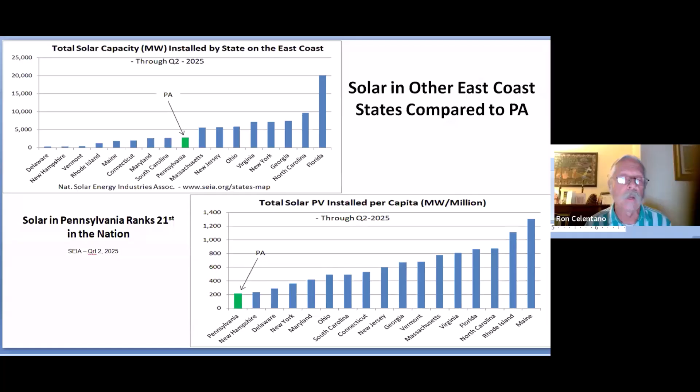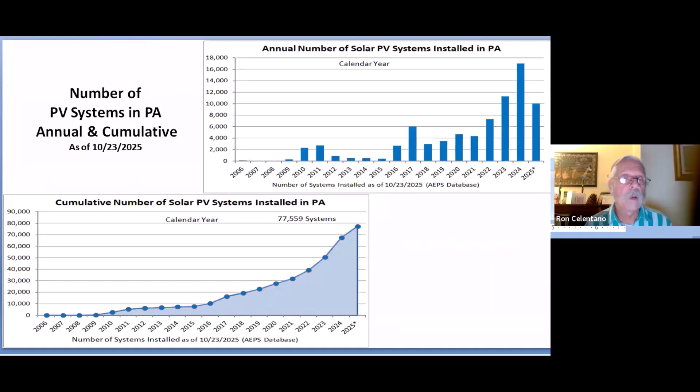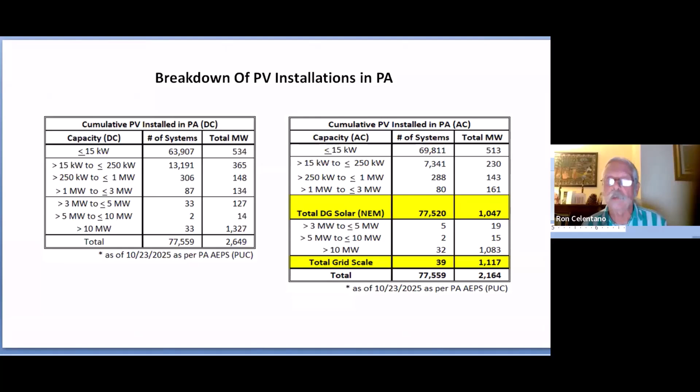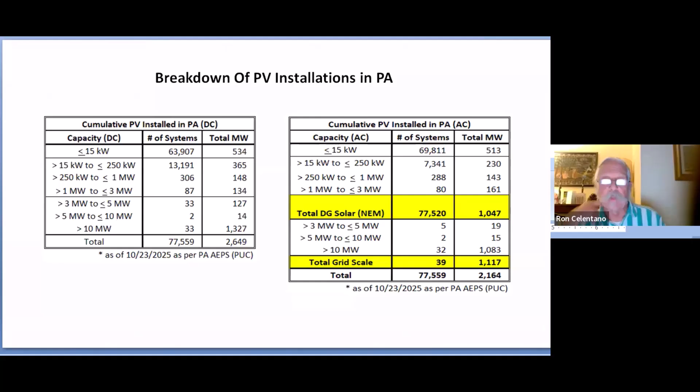Going down here, this is a breakdown of AC versus DC broken down into categories. So less than 15 kW is roughly residential size, then other categories. If you go past greater than 3 megawatts on the AC side, that becomes a grid scale project. We're looking at about half of the systems installed being DG systems, or distributed generation, behind-the-meter systems offsetting electric bills mostly, and the other half, another gigawatt, is grid scale. We can see a lot of systems installed in very recent times, basically the past 2.5 years.

Here's a breakdown of that in just the recent years. The gray bar shows the DC capacity, the total of all solar panels' rated values on the DC array, versus the AC or inverter capacity, which is normally smaller than the DC capacity of any given project. These are annual figures, and you can see how grid scale has picked up steam in 2023, 2024, and even into 2025.

What I find interesting, though, is when you look between 2024 and 2025, there's actually been an uptick in large commercial projects greater than 250 kW to 3 megawatts AC. So that's picking up a little bit more as well. This gives that breakdown of residential versus small, large commercial, and grid scale.

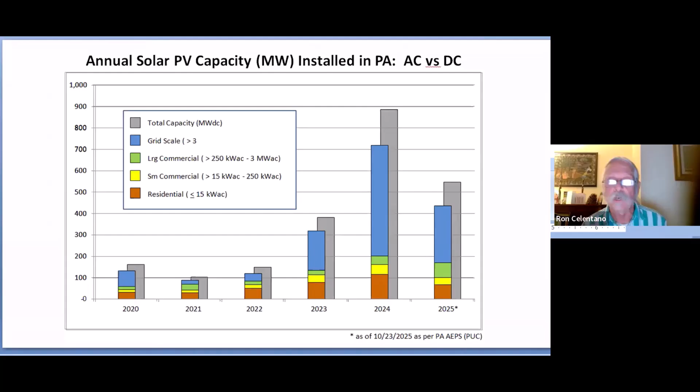Hold on one second, I'm going to blast through this really quick. This is on the PJM side, this is the grid scale stuff that's going on.

It's kind of showing how there were so many applications, you heard about this last month, and there's literally a jam up of a lot of big projects that are really moving very, very slowly in the queue. This graph is showing roughly how many it had peaked at, quite a few. We were almost at over 20 gigawatts of applications that were in place. A lot of those have either gone online, been constructed and gone online, or they actually fell off, pulled out altogether.

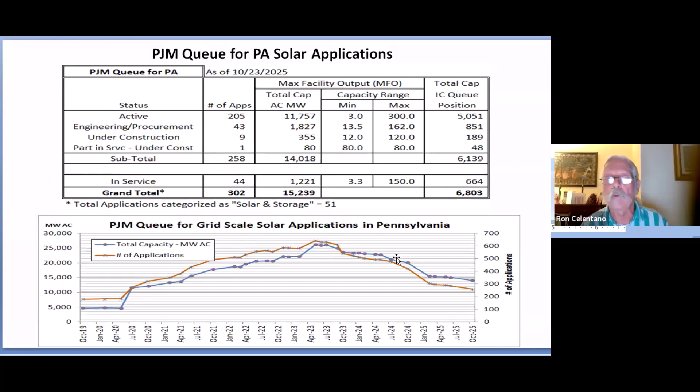This one shows the number of systems that are in construction right now. We're talking about almost half a gigawatt that are in construction currently. Some of these are pretty big, 120 megawatts, 90, 80 megawatts. We have some large systems. The graph is going up and down because as they go online, they fall off this graph, or they're at least in construction. As time goes on, a new one might come in from an application standpoint and come into play as being in construction.

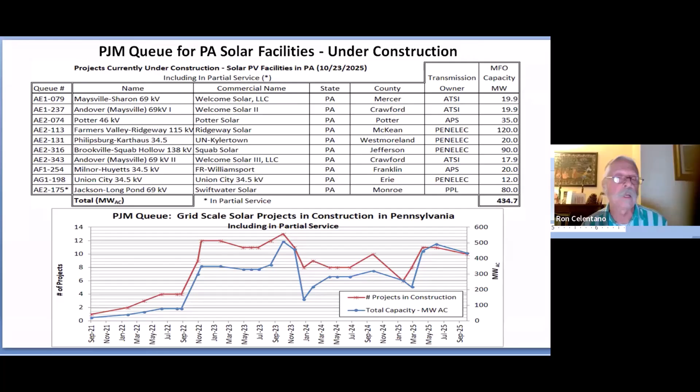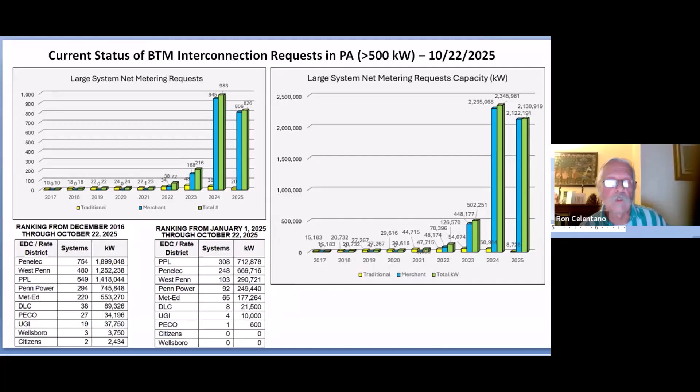I'm going to jump into talking a little bit about balcony solar, which you may have been hearing about. This is very popular in Germany and other countries in Europe, as well as around the world.

It has recently passed in Utah, and it's basically called plug-in solar. The concept is you could buy, say from Home Depot or IKEA, a solar panel with a plug at the end of it, take it home, hang it up off the side of your house, and just literally plug it into the wall. That's the simple concept behind it.

This has passed in Utah, and many other states are interested in drafting bill language to do that, including Pennsylvania. In fact, it could be the end of this month or beginning of next month that something comes through as an introduced bill. There's already a memo out there, a co-sponsorship memo, and there's a link for that so you can see how it's described for this particular bill. It's going to be coming out or being introduced soon.

What's interesting about this is that ideally you can buy this device, hang it up, plug it in, and you don't need to apply for an interconnection application. You don't need an electrical permit. You don't need an electrical inspection. You just plug it in and it offsets your electric bill. It might be very little, because it may only be 800 to, at tops, 1,200 watts of a system.

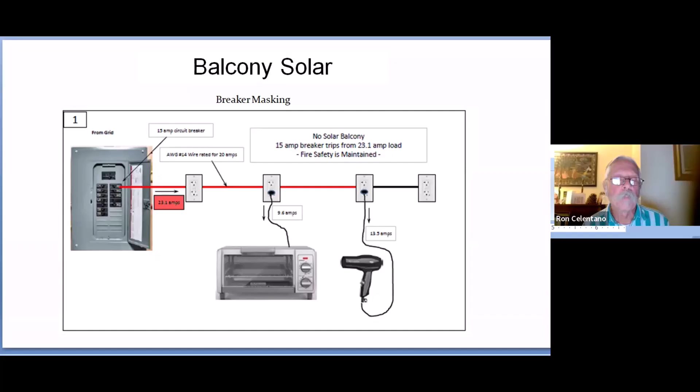So the point is it would be kind of important that the balcony solar is plugged into the very last outlet within a circuit. Now, the reality is no one knows which outlet in your house is the last one in your circuit. It would be pretty difficult to find what that is.

But this is where it becomes a problem. Let's say if I plugged it into the first outlet next to the electric panel. Now this is what we're talking about, the masking effect. You have the same loads there, but now they're both coming down from the same area, not distributed evenly across the entire wire. They're both coming from the same side of the wire. So the breaker does not see the overload, but the loads are still being served, and the wire is getting hot, exceeding what it's rated to provide with regard to current flow. So this becomes a problem.

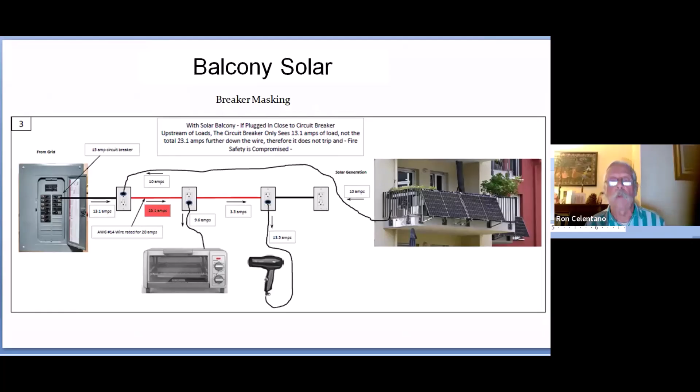And so the answer to some of these things is that they're coming up with concepts like smart plugs. So you may have to have a typical plug replaced with one that can sense the flow of electricity through it and will shut off if it senses there's too much draw relative to what's going on there. That's one of the things being discussed right now, and maybe there's going to be a UL listing for certain types of smart plugs.

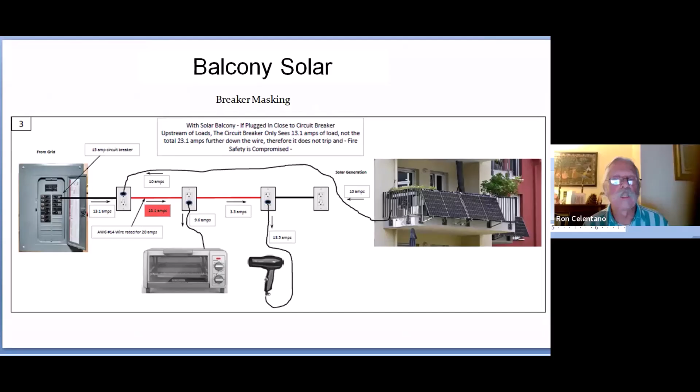So that is that. Let's see here, I'm gonna jump to... let me see. Chuck, can you see this? Okay. Yes, okay, we can see this. It's the same format that the other was in. It says Philly Green Solar Roof.

Yep, okay, good, thank you. So I'm jumping into this. This is what the other frame of this conversation is going to be about. Now, there's a lot of slides here, I'm going to jump through a lot of pictures, so I'll try to get through this pretty quickly.

So this is basically about a project I worked on. Ron, do you want to try theater mode again and see if you can bring that up, just to see if this is a different file? This is a different PowerPoint file, right? Yeah, you want me to try this? See if that works. You probably can't see that, right? At the very bottom on the right-hand side, the last icon to the right. Okay, I have a full screen. You do not? No, we do not. No, okay, yep, sorry, sorry to interrupt, just wanted to give it a shot. We have it, almost. Okay, sorry about this.

So this is kind of doing a real summary on what this is. The Onion Flats is a combination architectural construction group that was really working on passive house design, going back several years when they first did a lot of this. They did basically 3 systems, and they also work on green roofs, so they really cover the gamut on all the perspectives of passive house with green roofs. And they pulled me in to get into the solar design of some of these projects.

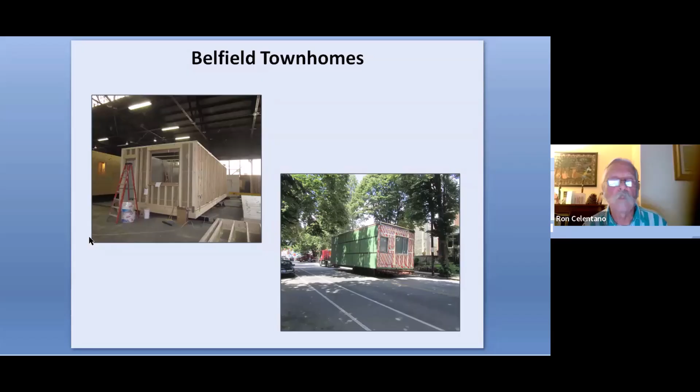I was going to just show you some quick shots of this being constructed. These buildings were built off-site in a warehouse, a very controlled environment, built in sections. You could see it being trucked along and put in place, and here they're using a crane to drop them into place. Then they really tighten them up. These are typically triple pane windows, super insulated, really getting to tightening up all the seams.

Now, what's really challenging with this, of course, is the electrical and plumbing is all done per partial floor, if you will. These are complete floors where they're dropping them in, but then you have to interconnect them after you drop them into place, and that's always been a challenge. You're trying to get it to everything - the plumbing, everything - to land just right, but you still have some problems to coordinate that. Eventually that gets lined up.

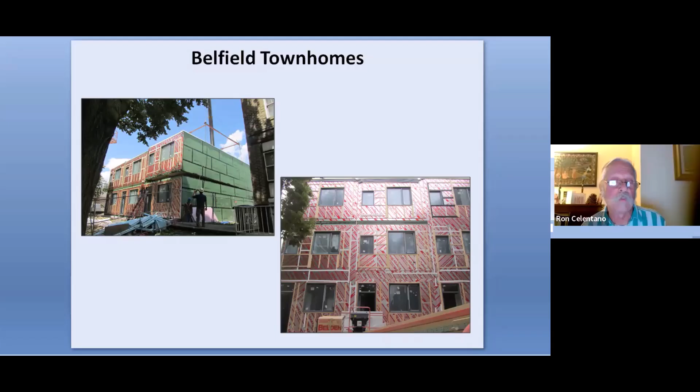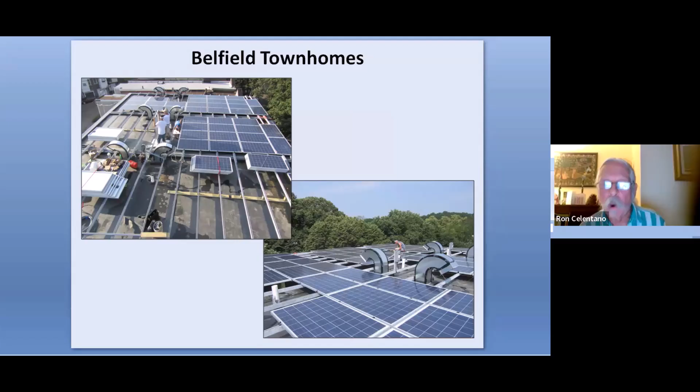This is sort of the end product of that project. Here's just some of the solar that was being assembled. Now we did use, unfortunately, some pressure treated plywood to help with some of this racking, but it's mostly horizontally positioned on this roof.

Yeah, so this was pretty successful at the time. I have to say, this was a long time ago, and I do not know how well it's performing at this point at all, because it was done for a particular owner.

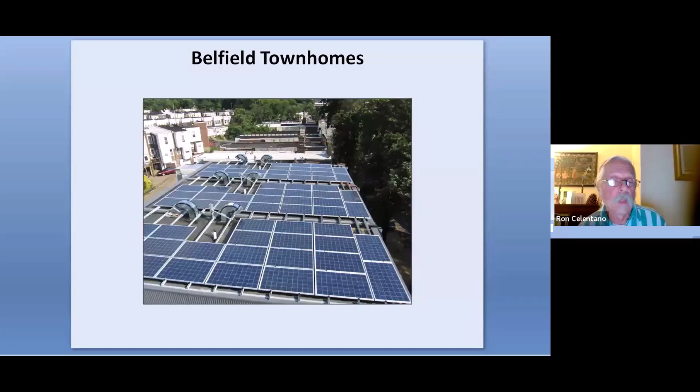The next one was Stable Flats, number 2, and this one we did incorporate green roofs into this. Again, it was really the same type of thing, 3 row homes next to each other, but 4 stories tall, and it was really market rate housing, so it was more high end.

Although it was all very much designed as hard as they can try to make it a certified passive house, they just fell short of achieving that, and that's usually done with a blower door type of test along with other things. They just fell short of meeting that criteria, but it was nevertheless still built for that.

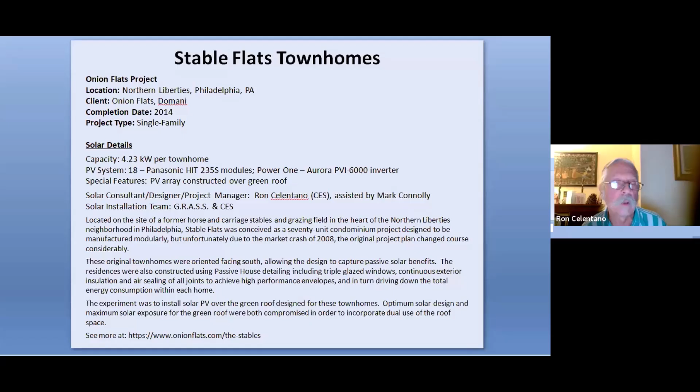So each of these row homes at 4.23 kW per townhome, I should say, but they were typically 4. Let me see, I'm trying to think of some of the other details on this - there's nothing really. Triple glazed windows, super insulated, same type of thing there.

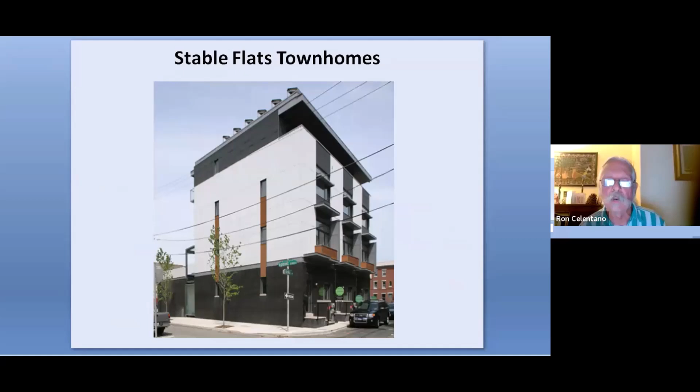And this is how I was looking at it. This is Northern Liberties, by the way. So you can see the modules, the arrays up on the roof of these 3 row homes right here.

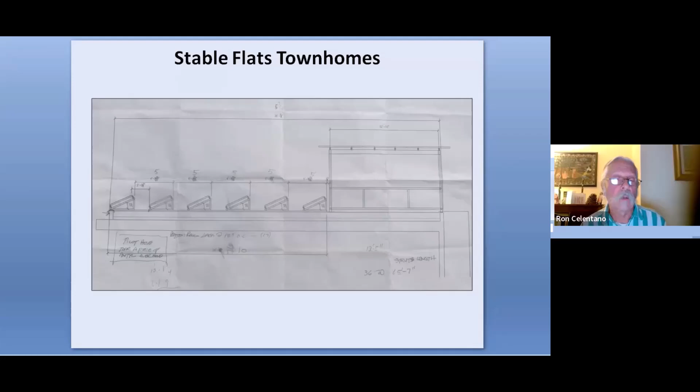Now, when we were starting to do this, it's always a compromise on how do you get the most solar, but still allowing for ambient lighting or indirect, diffuse lighting to go in and feed the green roof. So it was a balance. You're not going to get the best orientation to get the most generation, but you also want to be able to have your green roof work well. So this is the end product of that.

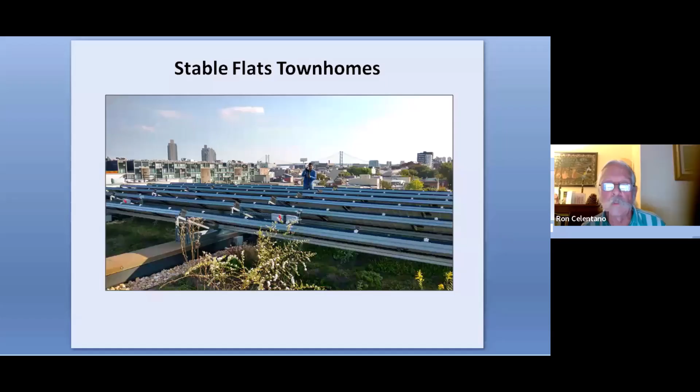This is probably a couple years afterwards when it was already installed. So you could see some of the greenery that is there. Here it is again in the background.

What happened was the economy kind of went south about that time. So Onion Flats wasn't able to continue with the full development of this, so that was sold off to another developer. They continued to build some of these structures, but they didn't have solar on them.

Now I think this was about the time, I think it was 2014, when transformerless inverters came into play. Now of course with transformerless inverters, you basically have to have a different configuration with your DC disconnect. You have to have it both on the positive and the negative side in order to do that. The inverter was down in the basement.

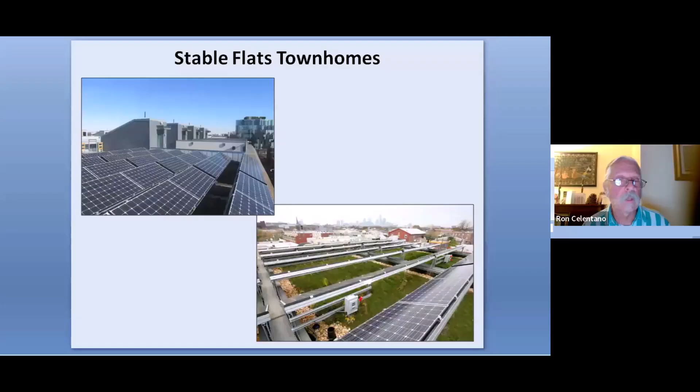We fabricated everything, or I should say Onion Flats did all the fabrication. They welded all of these racking systems together. This was basically spanning 16 feet across the parapet, and we used Unistrut to span that area and load these Panasonic modules on top of them. It was an interesting challenge to get the right fasteners to hold those modules down in place, but that all eventually worked out well.

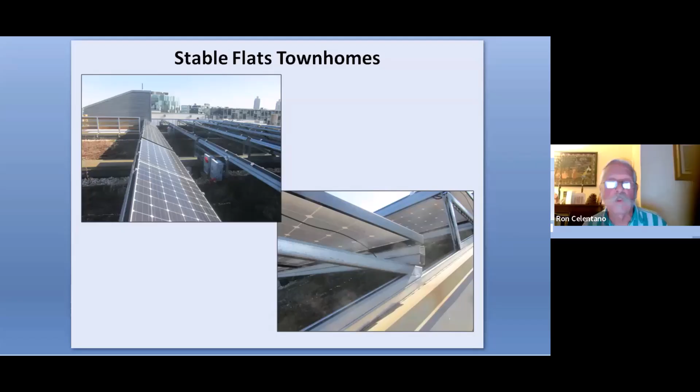The third project here is Capitol Flats Apartments, and this was a next step up - it really was an apartment building. The previous ones were row homes, but this is actually a 4-story apartment building with 25 units. The attempt was to try to do net zero energy, but it wasn't going to happen because there's not enough surface area on the roof to do that. This was a 77.7 kW system installed on top of the roof of this building.

What was interesting about this too is that Onion Flats had two 1,000-foot deep geothermal wells. This went pretty much down into the Schuylkill, I think, pulling up water from there. The crazy thing about this was it was not a closed loop - it was an open loop, meaning they sucked up all the water, and I don't know how they got away with doing that. They realized it was crazy to do, because the filtering that was required was enormous. A lot of upgrades had to be done to filter all this river water coming in, and it became a real problem at the end of the day.

They also had ground source - a big heat pump water heater that served the total building. Water that came up from the geothermal system, or water that exited from there, would pass into this heat pump water heater to begin the process of pulling heat and adding heat to it. So it would serve the hot water, and then be fed into two electric water heaters. But those never really went on - the temperature was already up to what it needed to be. They were really just holding tanks.

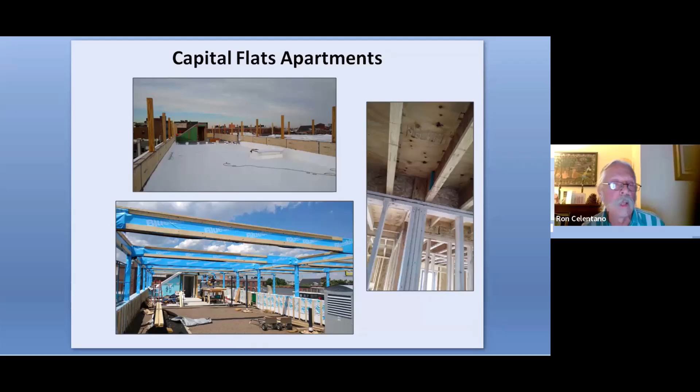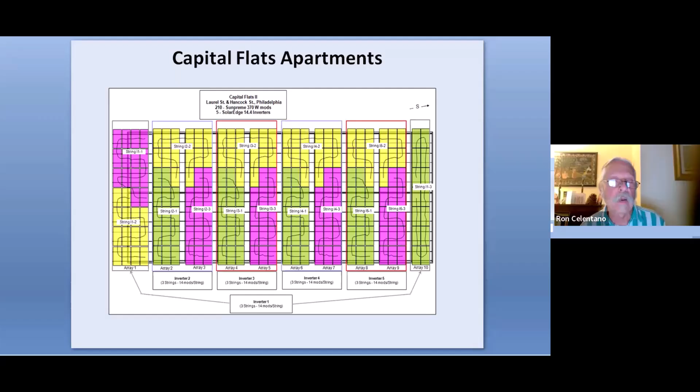This happens to be the wiring, just laying out the string wiring. This was a SolarEdge system - there were 5 inverters, and this shows how the wiring was arranged for the layout of those systems.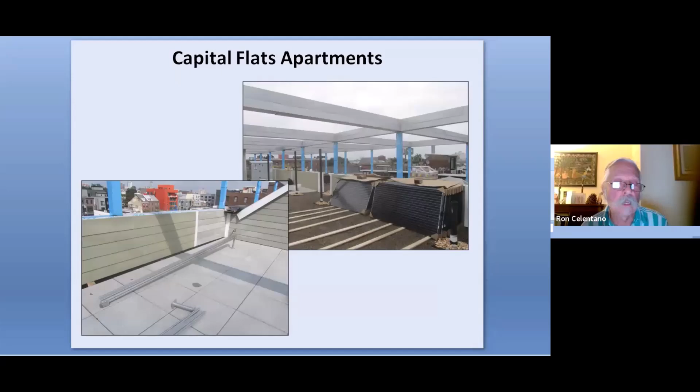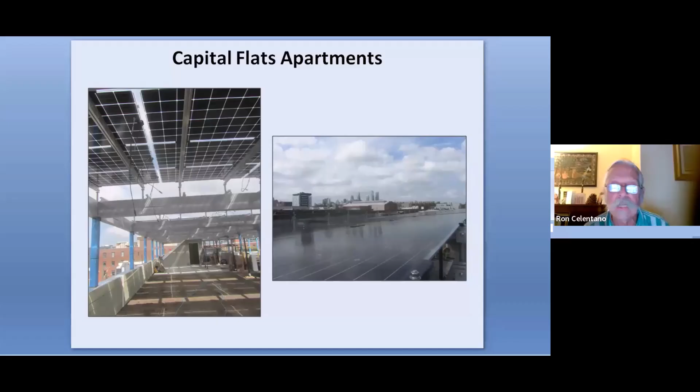Here are all the modules - these are bifacial frameless modules that went into play. And this is it in the process of being constructed on top of that. It has about a 4-degree pitch.

Here is the home runs of all the wiring, because all the inverters are at one end of the building, so they were all being collected, running down the length of the building.

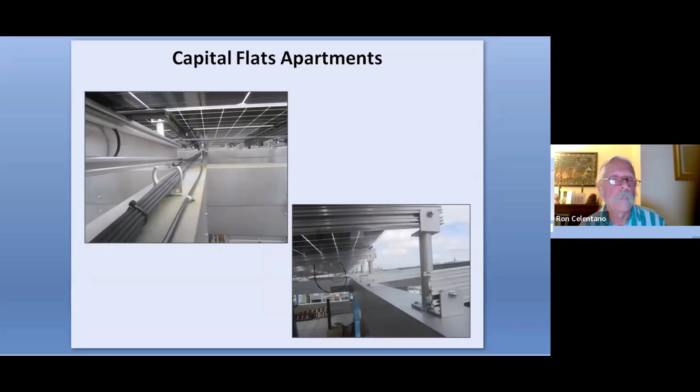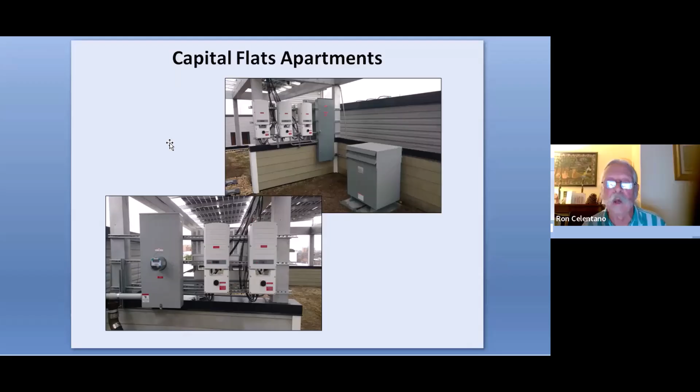This is a zigzag transformer that we needed in order to comply with PECO's effective grounding rule. It turns out to be creating sort of a neutral as a result of all this. It's a passive device - it doesn't really do anything at all, but it costs a lot of money, let me put it that way. It was really a pretty unnecessary thing, and we were able to get out of having to do it the next time around for the next project.

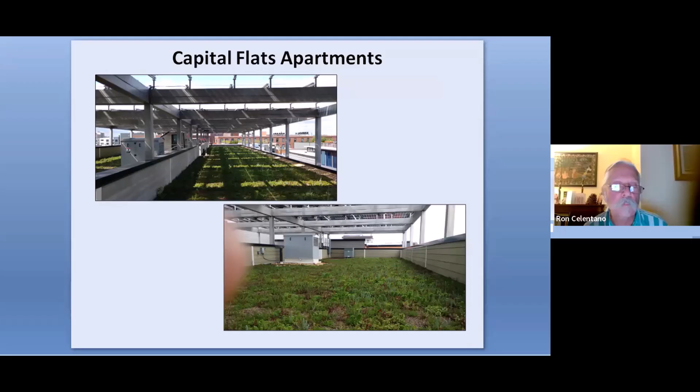So this is really the green roof kind of growing at this point, and you can see how the shading is, and also the lighting is passing through that. Here's another view of that building, and on the lower part there were 13 parking slots underneath part of the building, and they set it up for EV charging. So they had that in play as well.

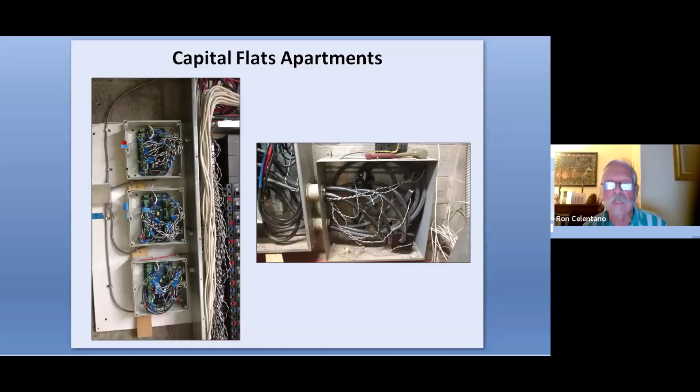Now, what I also got involved in doing for them was monitoring. So this is kind of demonstrating having CTs, these current transformers that wrapped around all the circuits I could find. We had a monitoring company that was doing the monitoring for us. Unfortunately, that kind of fell to the wayside, so we don't have that anymore. But basically, we were able to really get a lot of detail and data from that.

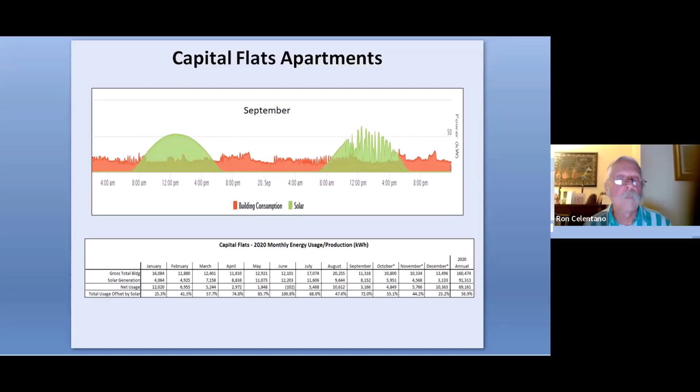I think is my time okay here? I got my last one here.

Yeah, you're fine. Okay, so here's the last one, the fourth one, which was even more insane. It kept getting more and more crazy, but it was exciting. So this one was another 4-story apartment building, again attempting to be a Passive House design. Didn't quite make it there, but it got pretty close. 172 kW system, and again bifacials, frameless modules.

The architect really wanted to try to achieve net zero. So how do you do it? Well, you don't have enough on the roof - you've got a 4-story building in the city, forget about it. So the idea was, hey, let's put it around the east, west, and south walls as well. Even though it's not optimum for getting solar, at least it's picking up some more of that irradiation, and you're able to get some more generation going on. So we almost achieved that, which I'll be demonstrating. But it also went over another green roof for this.

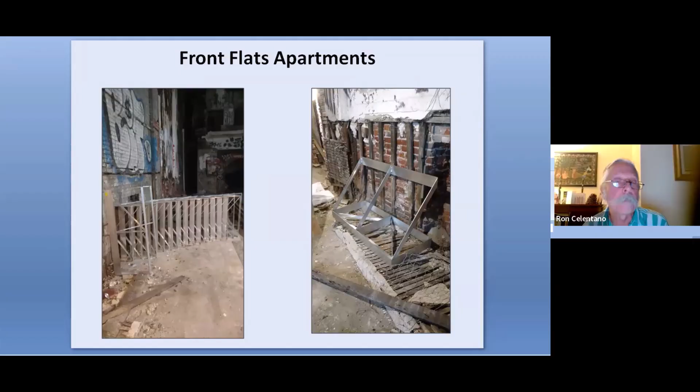And this is now the construction part. You can see these being mounted over on the right side, mounted onto the outside of the building. And the rails were then installed, anchoring onto those structures.

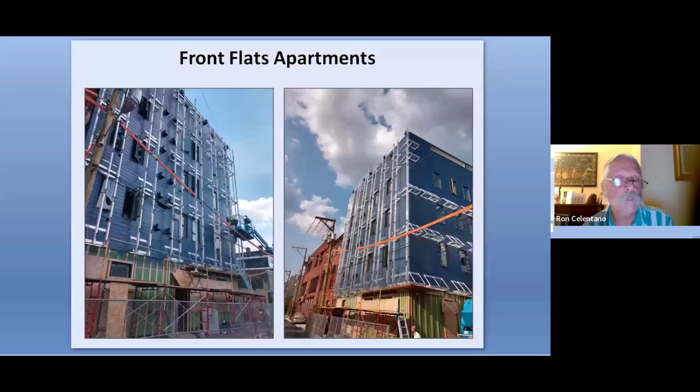Just kind of showing some of the insides of that, looking down from the roof down below and seeing how it's attached with the rails in place.

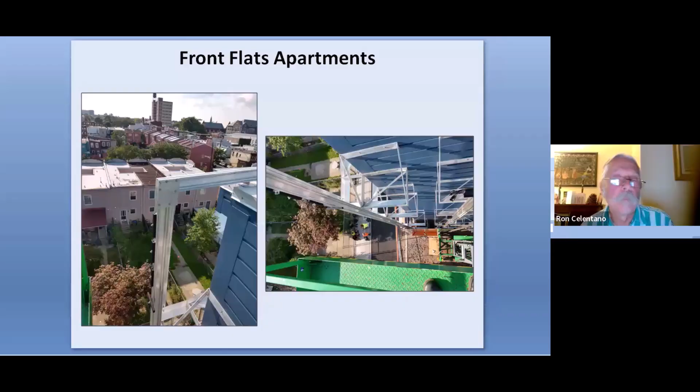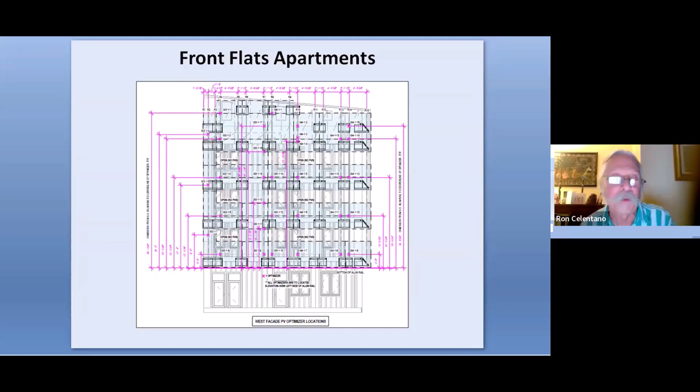This was a map that I had drawn up that was really very important, because again this was a SolarEdge system. These had optimizers, 1 optimizer per 2 modules. They had to be placed onto those rails very precisely in order to line up where those modules were going to be connected to. So this was a whole mapping structure of how this was all going to be put together.

And I have to say, there was no solar company that did this, by the way. I was a solar consultant, getting my hands dirty. I did some of the wiring, but it was more about the labor, the laborers that worked with Onion Flats, who were unbelievably terrific—how dedicated and committed they were to doing everything right. They followed all the very detailed instructions that I was giving them in oversight. I think the only times anything got a little misguided was because of me, but they always did the perfect job in what they were trying to put together.

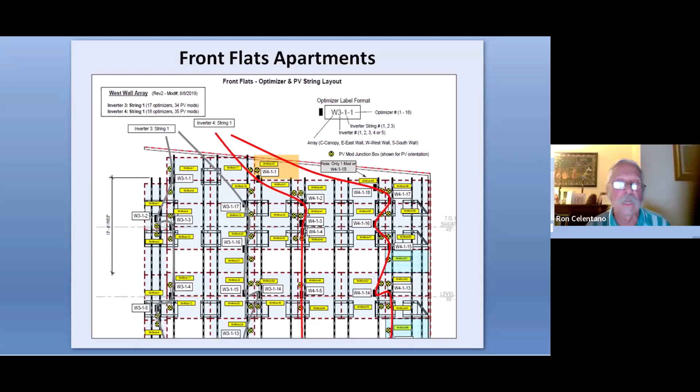So these were the kinds of drawings or maps I had on the roof, so everyone could follow what to hook up and how to hook them up, and that worked out quite well.

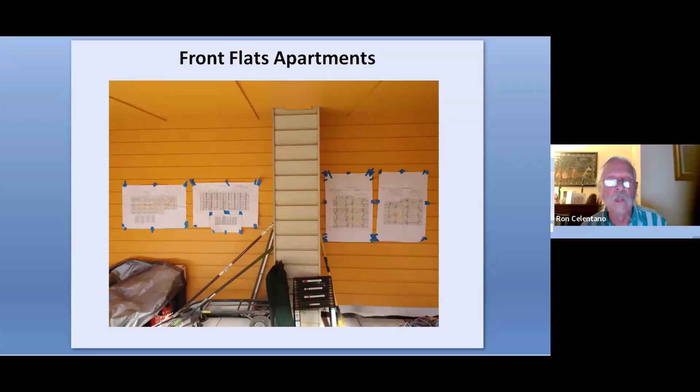This was an issue that came up in midstream of this being installed. I was very concerned that these clamps slide down a track inside these rails, and I was concerned that if they became loosened, these modules might slide down. So we ended up fixing these mid clamps with plates that were screwed right into the rail, so these could never really slide down.

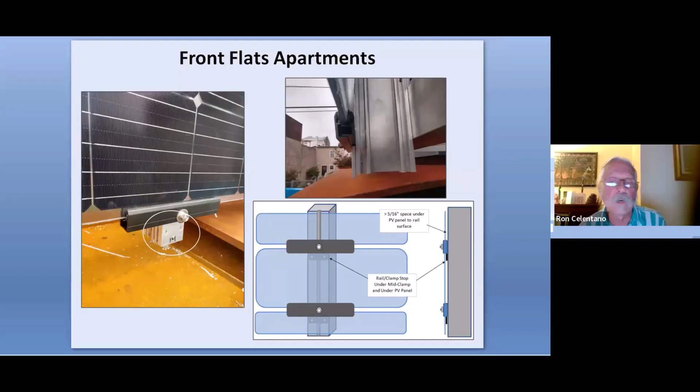Getting close here. This is the modules now going up in place after the optimizers are already in place, and they were sometimes put up, taken down again, put up, taken down, because they had to line up just right in order for it all to fit.

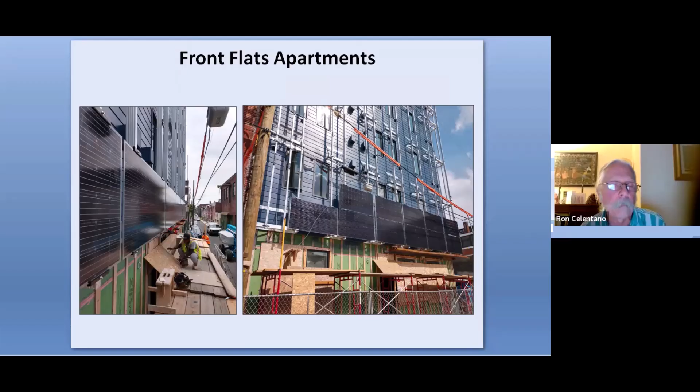Another shot. This is actually Tim McDonald, the key architect and CEO of Onion Flats. You can see how this is really kind of being well put together. This is on the roof, over the green roof.

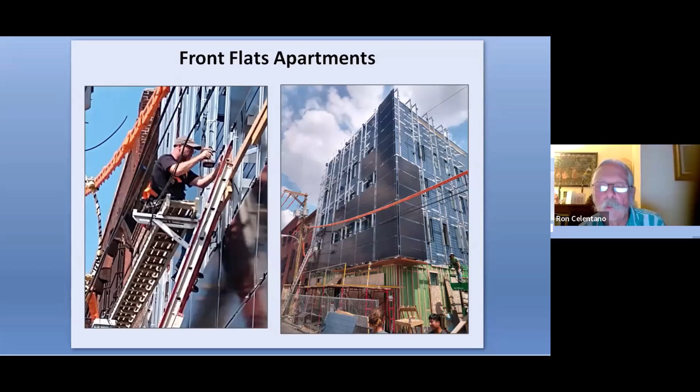Another shot of how this looks, and this is now looking down through that whole structure of all these racking structure pieces and how complicated it was.

Sometimes he had to get in there while this was being done, to get some of the wire ties in to tie up some of the wire whips from the modules, climbing into this. It's about 18 inches of space that you can kind of walk around inside there. It was kind of crazy indeed.

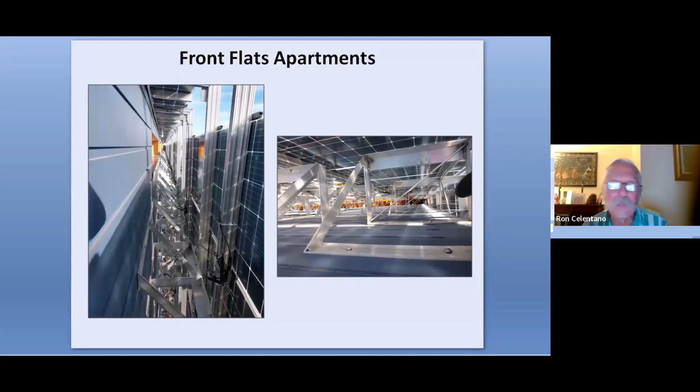This is now on the upper roof, where the green roof would be planted, but you can see how this is all looking. You can see up in here the openings where you could see the modules right there, on the south facing part of it.

Here is some of the wiring all coming together to where the inverters are going to be, which just happens to be right about here, and I'll show you that in the next slide.

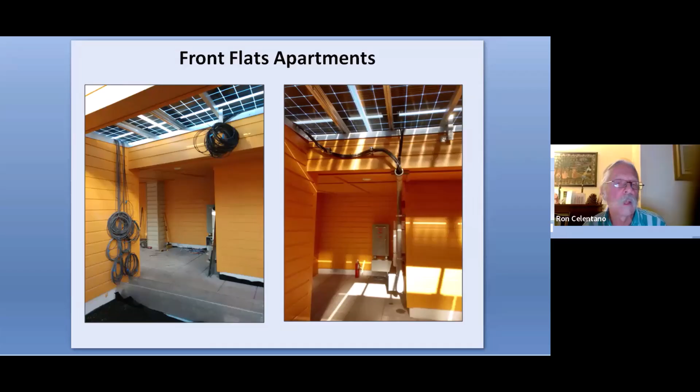So here are the inverters. All 5 inverters are in the green roof area, near the steps that go up, which has a solid roof over this particular part, so these were protected from the elements. On the left side is the accumulation panel where all the inverters come in, with the AC disconnects there. In the basement, all the 480 volt systems come down into a step-down transformer, going from 480 to 208, then tying into the service. This happens to be just a courtyard that they have at that site.

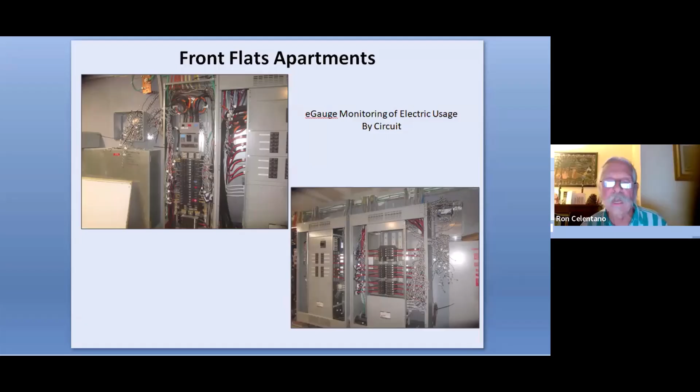So I mentioned before that I was doing a lot of monitoring. Here is the eGauge monitoring system used to monitor the usage as well as the solar from this project. There are CTs on every single circuit for every apartment and for all kinds of uses throughout, and it gets pretty hairy in how this all gets worked out. Here's a map I had to put together in terms of what CT is going to what particular circuit, and these are 3-phase circuits.

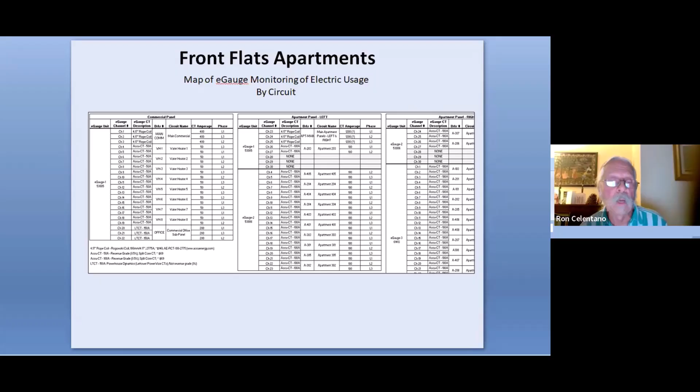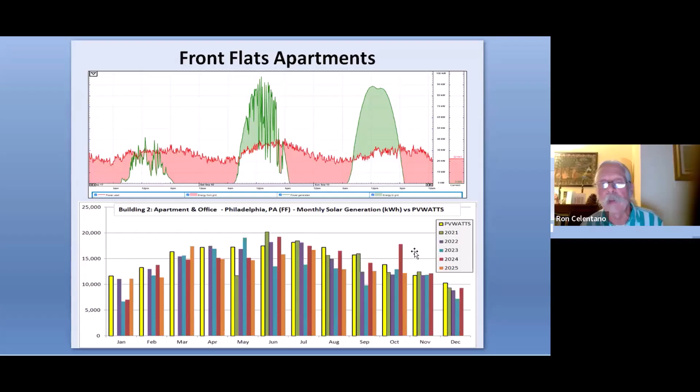And there were some crazy days. I was checking these out - why were some of these really like that? There were some months that were just outliers in terms of either their generation or the amount of radiance, either over or under amount. So that's what really was happening.

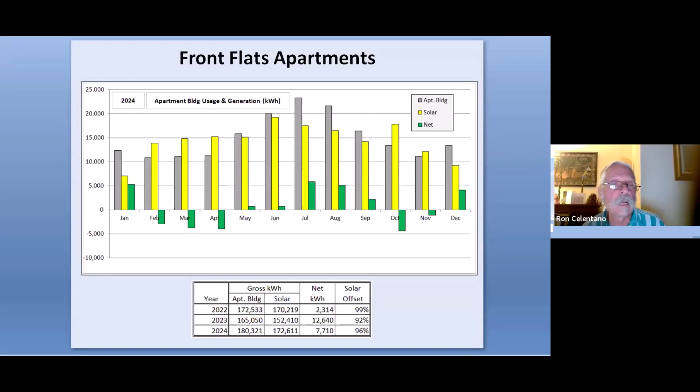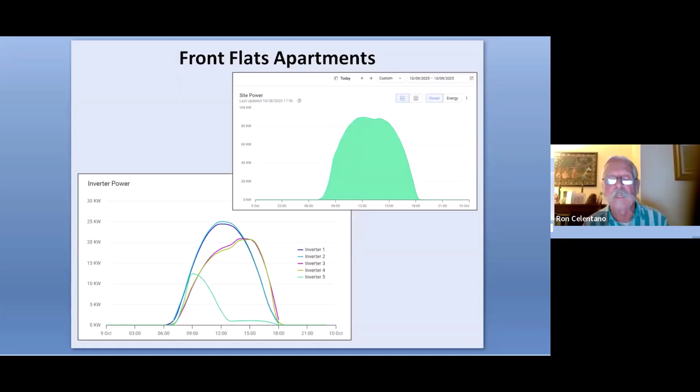The smallest curve you see there was actually the one that faced east. Right about 6 o'clock, the sun rises and hits it right smack on, and that's where the L train is actually running to. Then by 9 o'clock, the sun has moved over to the south side and past the plane of that east wall, dropping off very quickly to about a kW. After 12 o'clock, it's just generating a kW even throughout the rest of the day. So this was kind of an interesting thing how these all sum up together to the upper right graph.

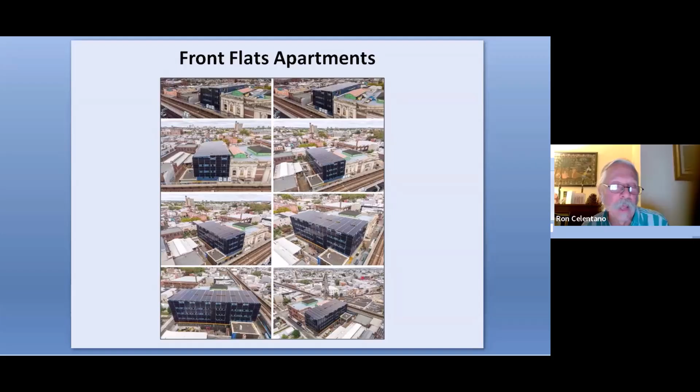Finally, this is another aerial shot of all the different perspectives from a drone to see how this looks - kind of like a Darth Vader building, but it's cool to see how that all looks. And that is it, that's just some stuff about me, but that is pretty much my end of presentation.

Great, thanks Ron. We have some questions. Chuck will lead those with Tom. Chuck, go ahead. Okay Joe, do you want to get the first one? I'm still looking for the chat here.

Joe, are you there? I can start. Okay, what did they sell for, is that the first one? What did the solar... I mean, you mean, okay?

You're asking cost - this was asked early on, Ron, trying to get an idea of the economics here. That part I couldn't tell you, and it's very hard to figure out because it's not typical, like here's an RFP, let's get a proposal, here's a solar cost of $2.50 a watt, and then you could do the economics. Because this was all sort of in-house, it was kind of murky to come up with installation costs. It was not established very well. There's a lot of gray areas, so it's hard to say what the economics really pan out to be.